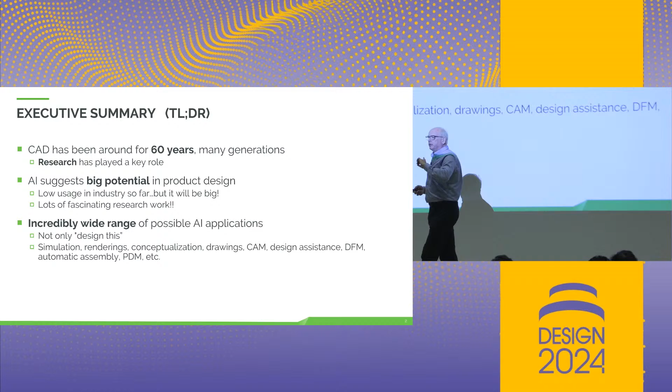It's research across a wide range of application areas. I've seen many people here talking about their work, and I'm going to show you some of my own. But it's much broader than just the nominal AI imaginative task of saying 'go design this for me.' CAM, PDM, rendering, and simulation are all fertile areas for AI thinking.

And finally, I want to talk about what I think we should be thinking about as we enter this AI era—what considerations do we, the tool builders and researchers of our industry, need to be thinking about?

First, a disclaimer about me: everything I'm going to tell you is as far as I know. I'm not an AI researcher and I'm not an AI developer—well, I did a little bit back in the old generation of AI in the 80s, but not today. But I do build real tools, as you know. So excuse me in advance for any omissions or errors I make; I'm just trying to communicate some points, and I know I'm leaving out a lot of information I could have added.

Let's start by going back in time to the past a little bit, because I think it's fun to think about how we got where we are with computers in general. In 1963, Ivan Sutherland wrote a PhD thesis called Sketchpad. How many of you have seen or heard of this amazing work?

Okay, some, but not many.

Incredible vision. This is 1963, and he builds what may be the world's first CAD system, and it's a research project. And he builds this in an era where there is no interactive computer use, there is no graphics toolkit, there is no hardware for interacting with the computer. He has to invent all of that just to fulfill his vision for how computers could help product developers. And wow, did he have vision.

So fascinating video. And you'll see he imagined not just CAD, but a workstation, a light pen, even constraint-based sketching, a hallmark of modern CAD. This is 1963. Incredible vision, incredible research, structural analysis, all part of Sutherland's work.

Now we move to the 1970s, research again leading the way and thinking about solid modeling. As great as Sutherland's work was, it didn't talk about solid modeling, it talked about wireframe modeling. This work is one of many around the world. University of Cambridge, BREP solid modeling. The first CAD systems appear, Computervision, Applicon, big computers, okay? I don't know if anyone's ever used these, museum pieces now. Good at wireframe modeling, not good at solid modeling. Many people tried to make solid modeling work out of the lab. None of the products worked very well.

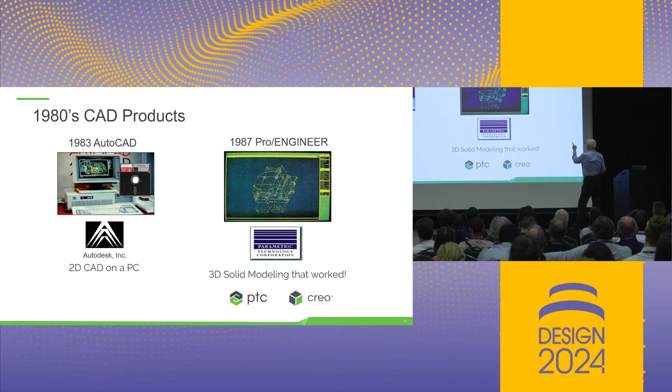By the way, I used to say exactly the same thing before I worked at PTC, where I work now, but when I was at SolidWorks, I would give a lot of credit to Pro Engineer because this paradigm of sketch, extrude, fillet, shell, this is the way all the CAD systems work. If you use SolidWorks, if you use Onshape, CATIA, NX, they all work this way. PTC, Pro Engineer. Today the product's called Creo. It's still an amazing product.

And this SolidWorks, how many of you have used SolidWorks? Okay, quite a few. Great, happy to hear that. We're glad we built it. It helped a lot of things.

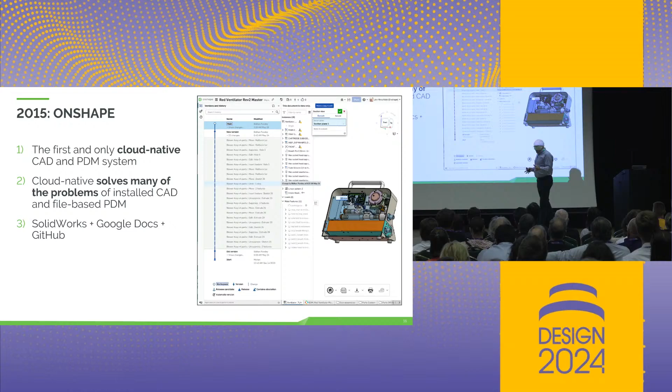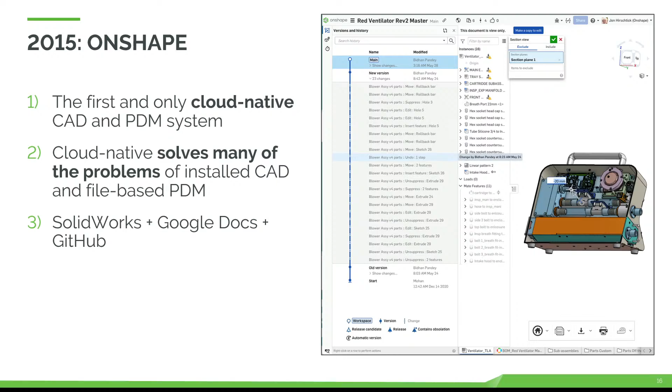However, I stayed at SolidWorks almost 20 years. And I saw our customers having all these problems with installing software and configuring computers and license codes and service packs. And that was the easy stuff. The harder problem was the data and hundreds or thousands of files and copying all over the place. And PDM systems, someone came up to me earlier who had built PDM systems decades ago. And I saw what was happening with cloud and cloud native systems, and I said, hey, we can solve so many problems that the SolidWorks customers have, but we need to build a new system.

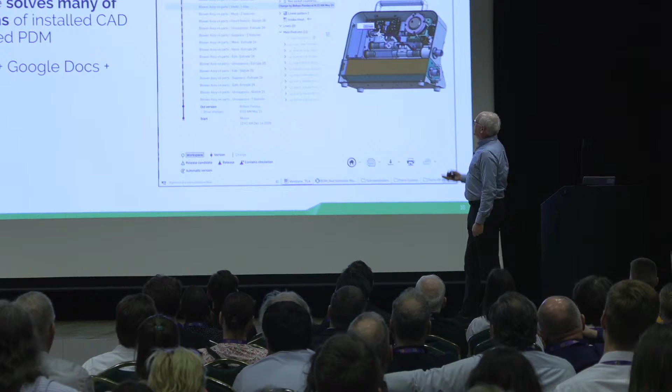And build it we did, and that's Onshape. It's still the first and only real cloud native CAD and PDM system. You can think of it like SolidWorks meets Google Docs meets GitHub, for those of you who've used it. How many of you have used Onshape? Okay, awesome, thank you. I hope all these things are valuable to you, but we have a lot of benefits

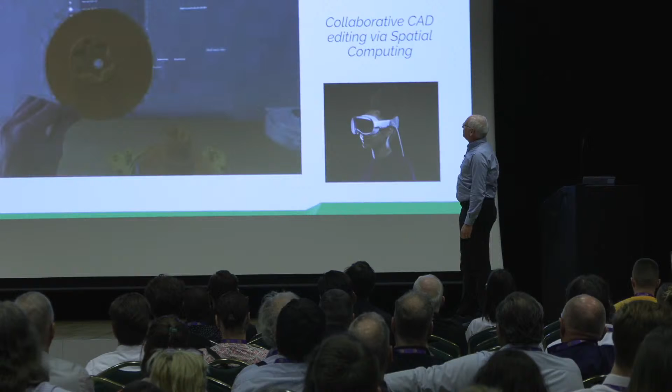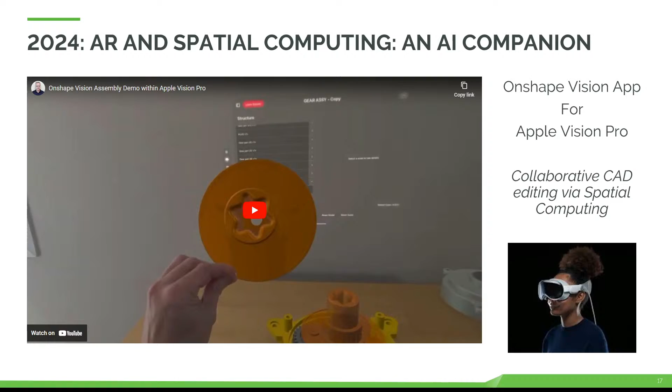here in it. So the last thing I'm going to show you in sort of the pre-AI generation is right at the seam between regular CAD and AI: spatial computing, augmented reality. I have a video here, and I don't know if we can roll the video. If not, that's okay. The video would show you through the lens of an Apple Vision Pro a user manipulating parts in an assembly, okay?

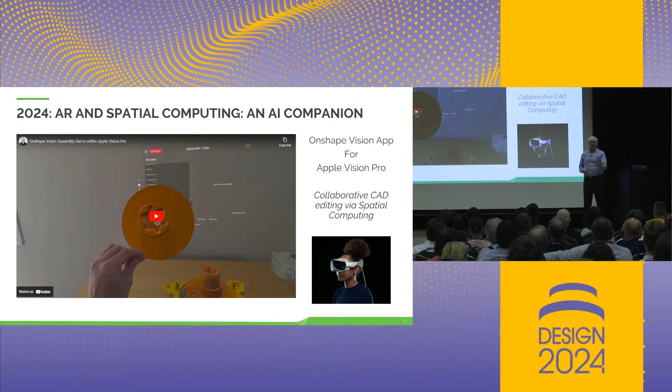And that experience, I think, is going to go hand in hand with the AI generation for certain applications, not all. And in fact, by the way, we have an Onshape application shipping on Apple Vision Pro. It was shipping the day the Vision Pro came out. So for those of you, and I saw many of you are experimenting with AR, you should check out the Onshape Vision app. It's a commercially shipping app, and it's a full client for live CAD data.

You can collaboratively edit data while someone's looking at it through the Vision Pro. It's not just a viewer, it's live editing, okay, and collaborative editing. Really very cool, we're very excited about it. Okay, now I finally get to the AI part, which is probably what you're most interested in.

I take my vision for AI and design from a lot of places, but one of them is Iron Man, the movie. How many of you saw the Iron Man movie? Okay, why am I bringing up Iron Man? When I saw that movie, that was another jaw-dropping moment because it's got Tony Stark, the character, and he's talking with an AI assistant, conversational AI. He's using augmented reality and hand gestures to design.

I found that to be a powerful vision, and I think we're getting closer to it coming true. I'm not saying it has to be like Iron Man, but it's a pretty interesting moment in the movie, and again, I'd encourage you to watch the video.

So what is in use today? AI, if I go into a customer, what can I find? Customer, an end user, not research lab, but end user. What's being used today? And I'll show you a wide range of examples. None of them are being used all that frequently. Maybe 1% of all customers use any of this right now, but it's interesting to see it actually used in industry.

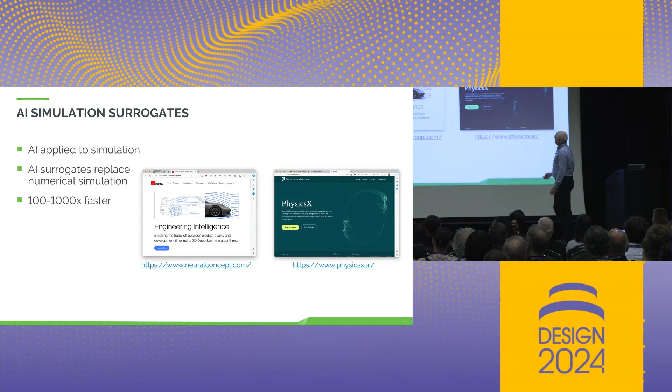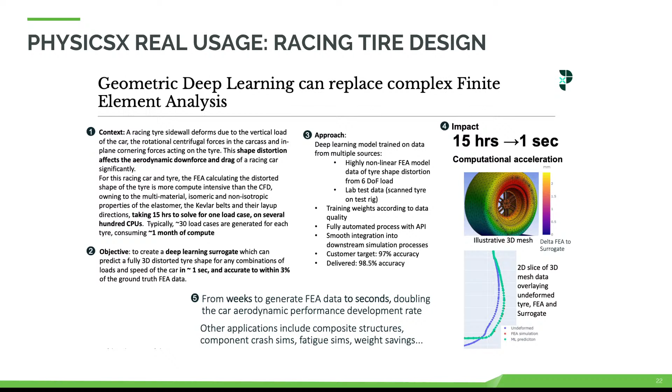Here's an example of a simulation surrogate. Highly nonlinear multiphysics simulation of a high-performance car racing tire. It used to take 15 hours, now it takes 1 second. Very powerful and being used by real customers on many examples.

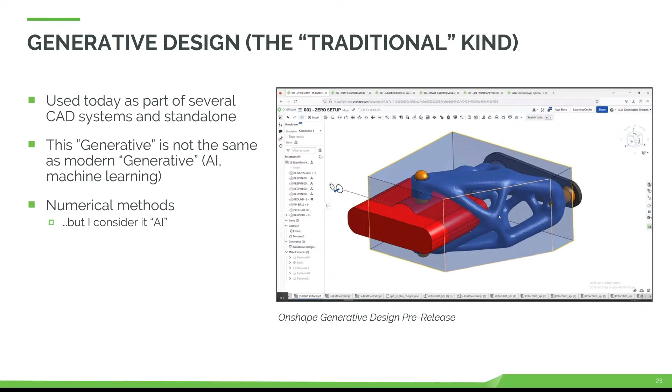Generative design, I'm going to start with the traditional kind, not generative AI, but in this case you give a boundary of the part you want and tell it some loading conditions, and the system will generate a shape. I assume many of you are familiar with this, some of you may even use it. You get these organic looking shapes like the blue part shown here. This is being used as part of several CAD systems, standalone products as well.

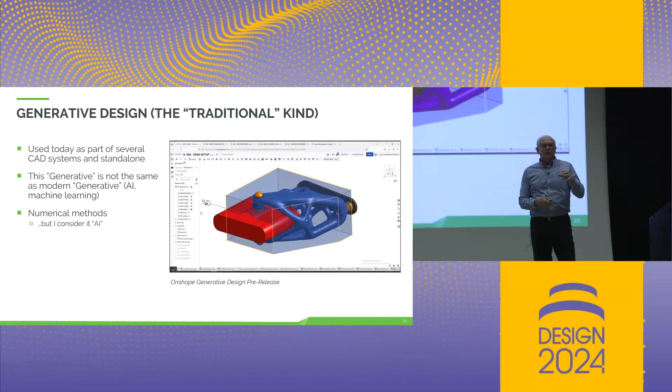The question is, do you consider this AI? Well, I do. And some people say to me, I don't. So to settle the dispute, I asked an expert, I asked ChatGPT if we could consider this kind of generative real AI, and the answer I got was yes, you can consider it real AI. So I feel good now that ChatGPT sort of backs my view.

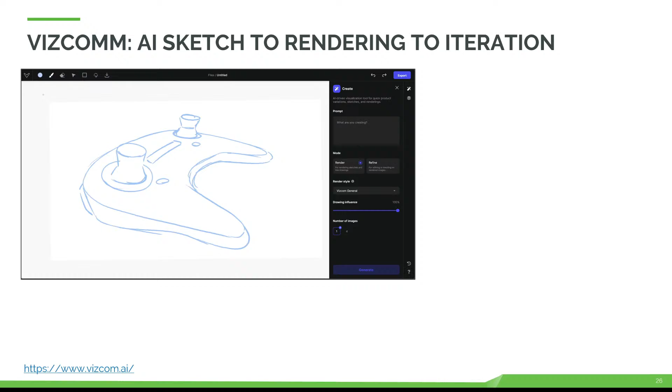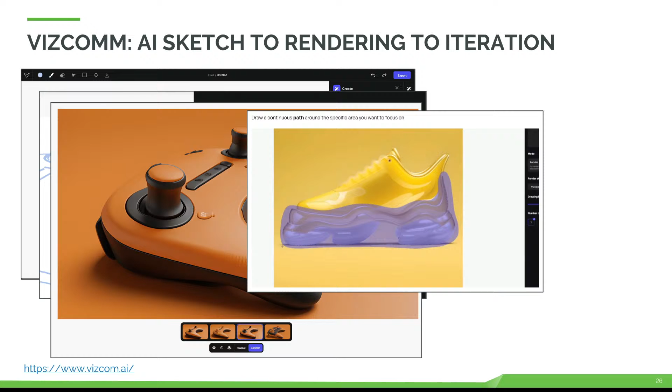Here's another example. This company, Vizcomm, takes sketches and turns them into design concepts in the image space only. So you take a sketch and you say, orange and black controller, Nintendo-like, and it gives you this. Again, just a bitmap image. You can also take an image, in this case, of a shoe and outline the blue area and say, I'd like you to refine just this area of the design, make it look more like an Adidas shoe, and it'll give you the result.

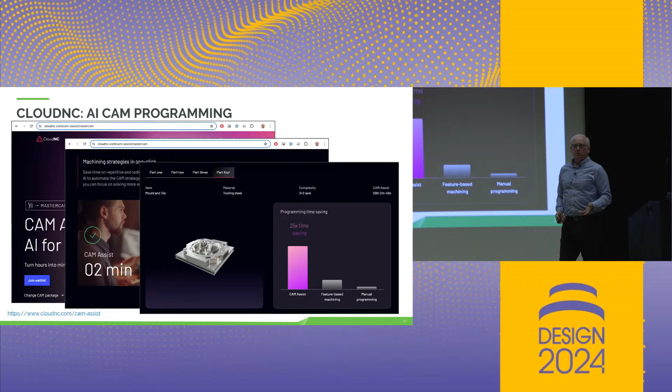Pretty cool, and again, being used in real industry. CloudNC, this isn't a CAM system, but rather an AI assistant for a CAM system, say Mastercam, and it drives the CAM system, creating programs, claiming to go from what takes a human hours to minutes, and they show real parts of interest, and I've talked to people who've used it who say this really does work. So, really cool.

DraftAid, they take a 3D model and automatically generate drawings like this one. Reasonably complicated, suggests real use, and I have heard of people starting to use these. I think the most widely used tool today in product development, though, is just general AI tools, using ChatGPT to summarize things, or ask for advice, or look through spec sheets and things.

I'm seeing people talk about using AI imaging tools to do things like resolution enhancement without even making a big deal out of it. They'll just matter-of-factly say, oh yeah, I used a resolution enhancer to improve the image. So that's a cool thing. This is far and away the #1 use of AI in product development. Okay, so very little, maybe 1 out of 100 companies using anything besides ChatGPT today, but I think it's going to grow. But a fascinating range of commercially shipping applications and an even broader range of research.

Now, I'm only going to scratch the surface in reviewing some research projects that I happen to know of that I think are interesting, very broad range. All the references are in my slides, and the recording of this talk you can find, or you can even grab the number from the slides and go to arXiv.

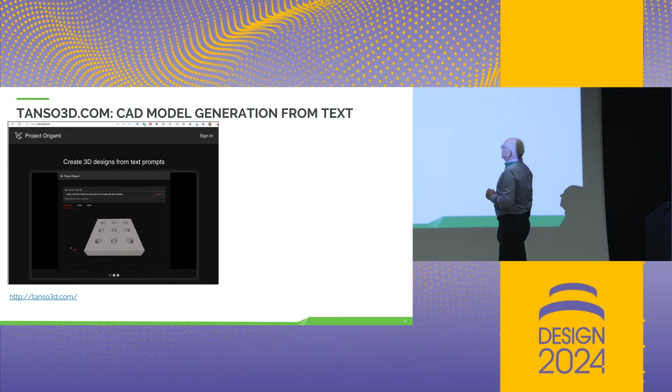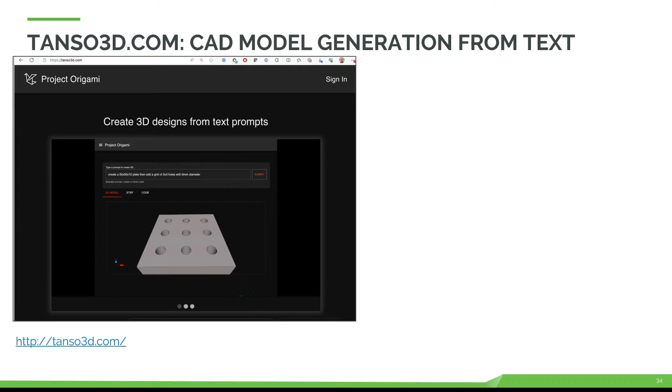Another interesting project, this is a startup company, but I call it research because it's not shipping yet, to my knowledge. This is one of the many efforts I've seen to generate geometry from text prompts. So you say, hey, give me a block that's this big with a 3x3 array of holes, and it will generate it. This is very interesting work. However, it's still very simple geometry, and all the projects I've seen like it are still relatively simple. That's not a knock on it. I'm just saying here's where we are and here's where we're not.

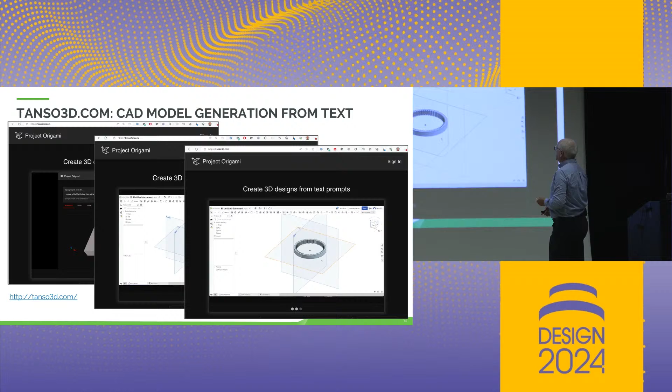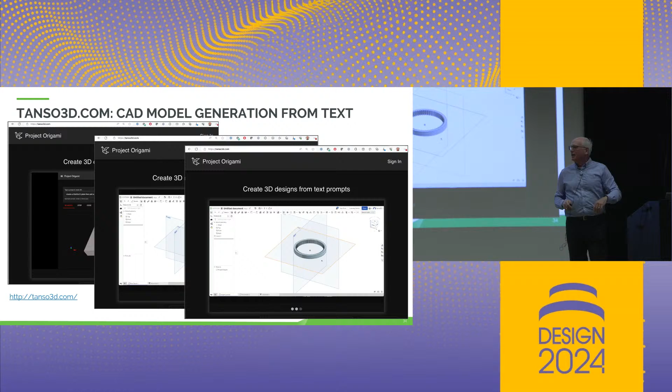This has to become usable for more complex geometries, but it's quite fascinating to see it generate shapes and load them into a CAD system. In this case, Onshape, because it happens to be on their website and it happens to be someone I know, but I think it would work with other CAD systems as well. So that's probably an application you knew about. Here's one you may not know about.

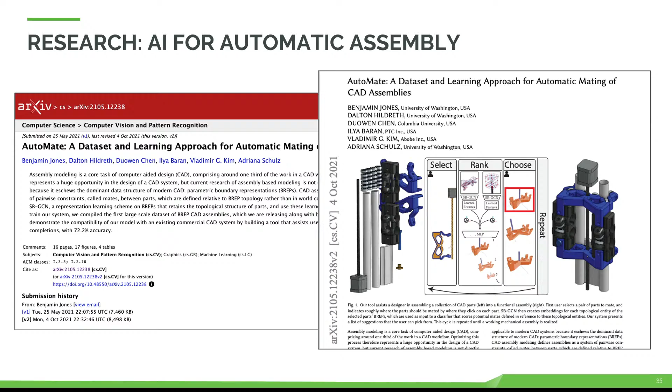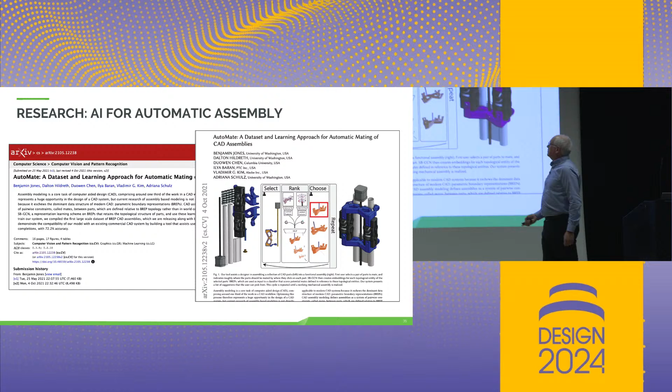This is automatic assembly. Everyone knows you take parts in a CAD system and assemble them with mating conditions, right? You've probably done that. This attempts to do it automatically by training on an AI data set. So you go from this bucket of parts to this finished assembly, and the results are actually very encouraging. This team is from University of Washington and Columbia, but also has people from Adobe and someone from PTC on our Onshape team. Our Onshape team isn't shipping a lot of AI products yet, but is working on research papers, so you'll see PTC employees like Ilya participating in these papers.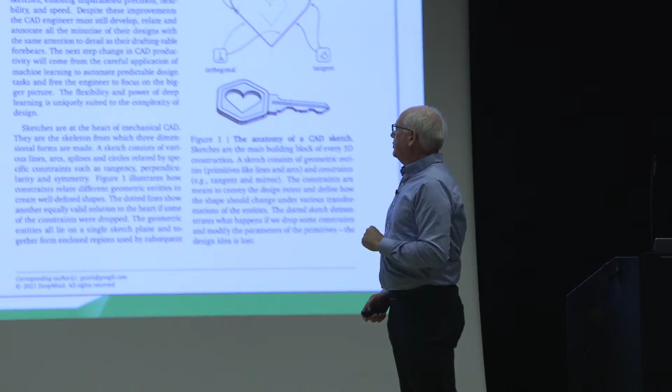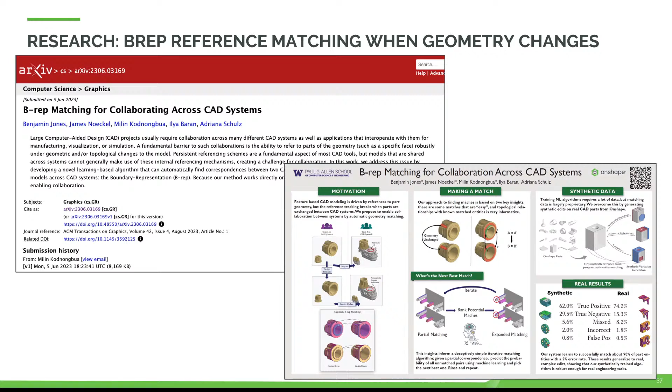An area you may be surprised to know about is work in the nuts and bolts, the nitty-gritty of CAD geometry. This is a project, by the way, something we spend a lot of time on, so we're very motivated, and not surprisingly, a couple of Onshapers worked on this. This problem is you take a dumb solid out of one CAD system and import it into another. Maybe some of you have done this. If not, you'll kind of get the idea.

And you reference surfaces on it to build new geometry. Now the original solid changes, you re-import it. How do you figure out where the references go? Onshape does this already. SolidWorks does this already. Most CAD systems do it already. The question is, could we do it better and faster with AI? And the answer is, not quite yet, but very promising.

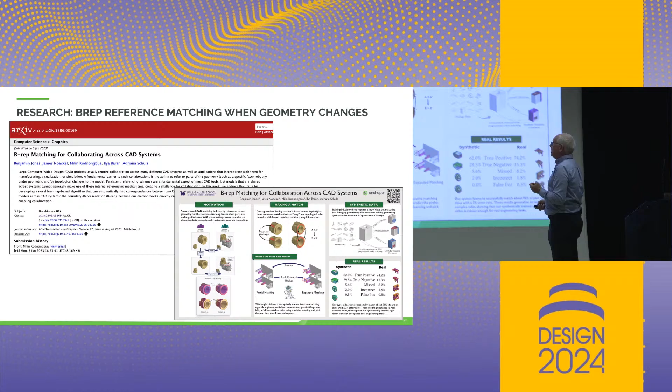And so a rich area for AI for us is the details of geometry. Could we get AI-assisted filleting? Could we get AI-assisted surface creation? This has big payoff because users spend a lot of time doing that.

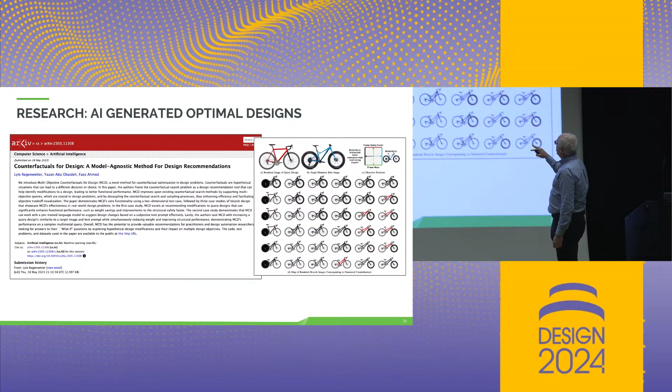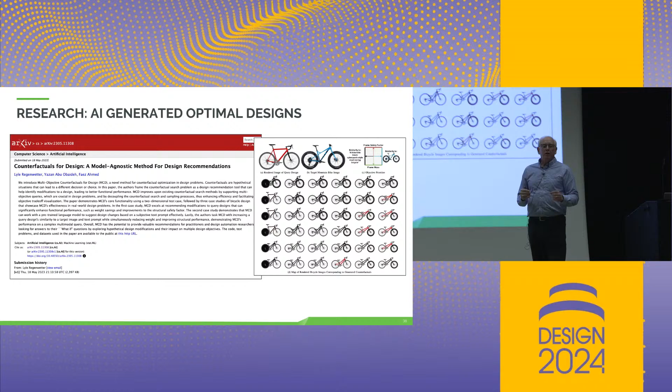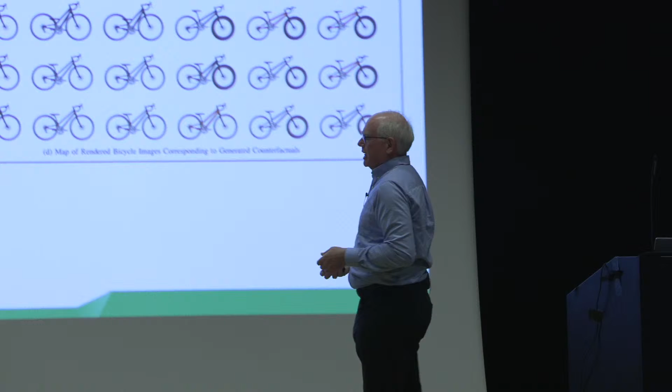This is a fascinating project out of the Decode lab at MIT, Lyle Regenwetter and colleagues. This is multi-objective counterfactual optimization. So it's optimization, in this case of a bicycle, which can include traditional optimization, like make this frame lightweight and strong, but also can bring in simultaneously optimization goals like make the bicycle look like this image that I'm giving you, and also a text prompt, like make it look a little like a black cyberpunk style bike, whatever a cyberpunk style bike is. I don't happen to know that, but the AI bot does, and it will generate an optimized model.

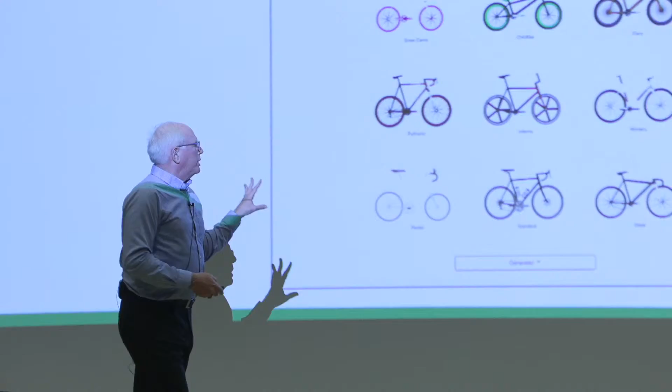I find this fascinating and probably fairly close to being useful for real users. There's a website, again, the link is in the presentation slides, where you can go and try this out yourself. Another very cool product out of that MIT lab is linkage synthesis.

First, they generated 100 million planar linkages. Anyone ever design a linkage by hand? Yeah, not particularly easy. I see some smiles out there, right? There's no easy, obvious way to do it. It's just kind of trial and error. Well, they're working on this with AI, trained it with 100 million, and now there's a result where you can give it a path, like say the letters IBM, and it will synthesize one linkage that will draw that path.

Anyone want to try doing that by hand? Not me. It's a tough problem. And that's a single motor driving the linkage. So I think this is very encouraging. Not everyone is designing linkages every day, but this could represent a class of very labor-intensive design problems that might yield to AI approaches. Oh, sorry to stand in front of you.

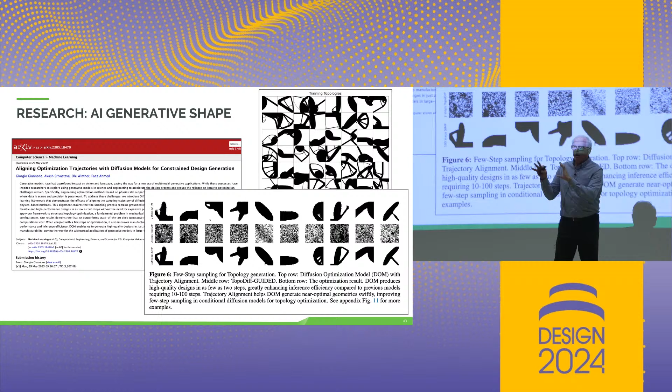This is a really interesting one. I talked earlier about numerically based generative design, right? The blue part I showed you earlier. I think you're probably all familiar with it. This is an attempt to use diffusion optimization to accomplish the same goal in a very different way. So I think the bottom is sort of a traditional approach, and the top row is the diffusion generated approach.

So essentially, as I understand it, and I already told you I'm no expert, you're taking the technology of image generation that we're all familiar with from AI and trying to repurpose it for generative design of structural shapes, in this case 2D cross sections, and it works shockingly well. So this could lead us to better ways of doing even the type of generative design that you know about.

And I'll show you an experiment, consider this from like Onshape Labs. This is not shipping. I can get into why if anyone wants to know. We can do that in Q&A. I don't want to get too distracted. But this is probably nothing you'll be surprised at.

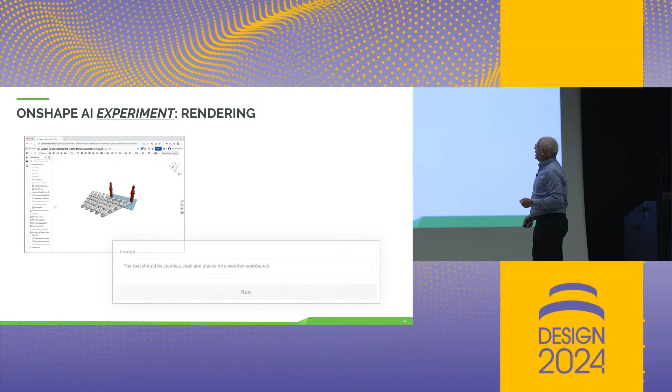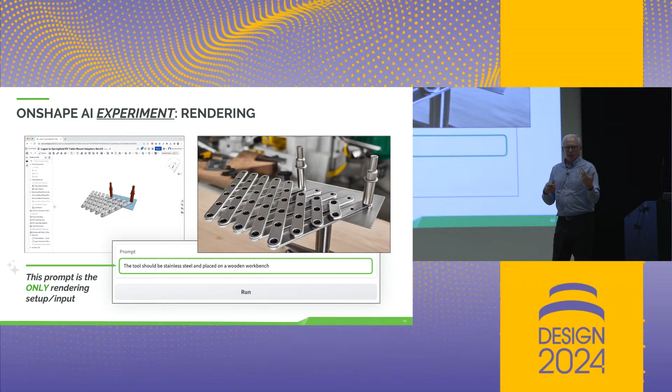You take a CAD model and you just give it a prompt: it should be stainless steel on a wooden workbench, and you run it and you get a nice image. This is the kind of thing we're experimenting with. We, of course, have traditional rendering in Onshape where you can do photorealistic rendering, setting up the problem and all that. We can talk about the differences there.

And finally, in geometry, this is my last geometry generation project. This is a system out of OpenAI research that generates 3D objects as point clouds.

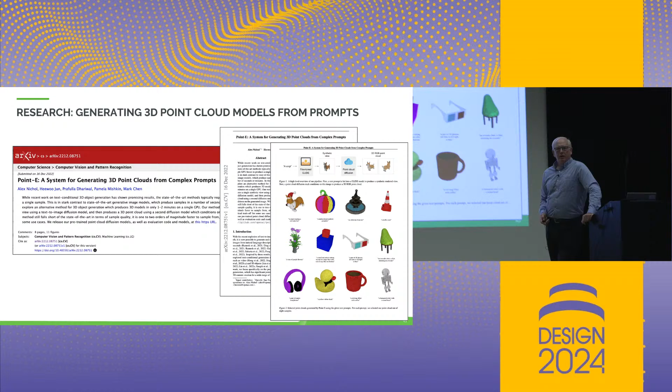Okay, so these objects here are generated from text prompts, and they're point cloud geometry. Very coarse objects, but a surprisingly rich range of descriptions, like a vase of purple flowers, or a red coffee mug, and it generates it. So this is interesting work, and interesting to see OpenAI venturing into our world of CAD and design tools in 3D.

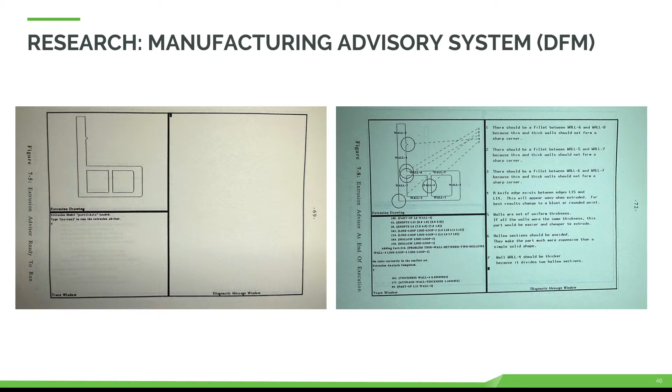Here's a system for manufacturing advice. You start with an aluminum extrusion cross-section over here, and then the system tells you manufacturing improvement items, design for manufacture. You should eliminate the sharp edge. You should make that wall thicker, and so forth.

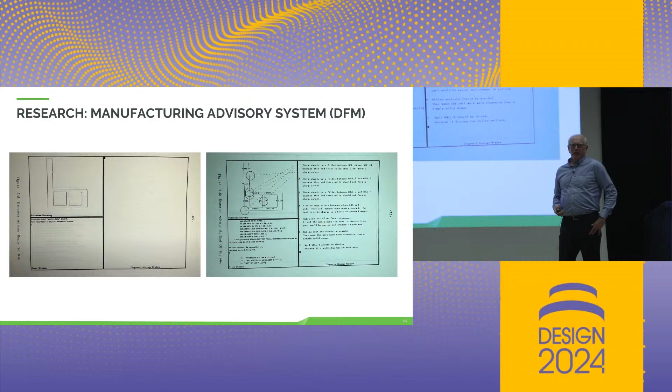This I threw in for fun. This is not a modern AI tool. This is from my own master's thesis in 1986. And if you remember, I mentioned that we did some AI work in the 80s because we thought AI was going to be the next big thing, and I actually wrote my thesis on a Lisp machine, if anyone knows what that is. If not, you can Google search that.

And I said in the thesis, artificial intelligence programming languages and environments are very valuable tools for developers of CAD software. I was only about 4 decades off in time, and that's the way it is with research sometimes, right? But seriously, the tools I had in that day were completely primitive compared to what's going on today, but I just thought it was fun to show you that.

And there's many more potential areas. PDM, industrial design, I mentioned. Anywhere parameters need to be entered, design standards, requirements and specs. It doesn't have to be geometry. It doesn't have to be 3D like I'm talking about. But hey, that's where I spend my day job, in 3D, so that's what I think about. But there's a lot of design help that can be done that doesn't involve the hard problems of geometry, and those can be as much or more valuable to the product developers of the world. Geometric search is another big area that I didn't cover.

So that's my quick tour of a bunch of different research, and I only scratched the surface, but I hope you're inspired a bit by the breadth of what people are thinking about. I asked a professor friend, who knows everything about AI and product development these days? And they said to me, nobody. There's too much going on, and it all changes every day. Maybe someone in this audience knows everything, but I haven't met anyone yet who knows everything.

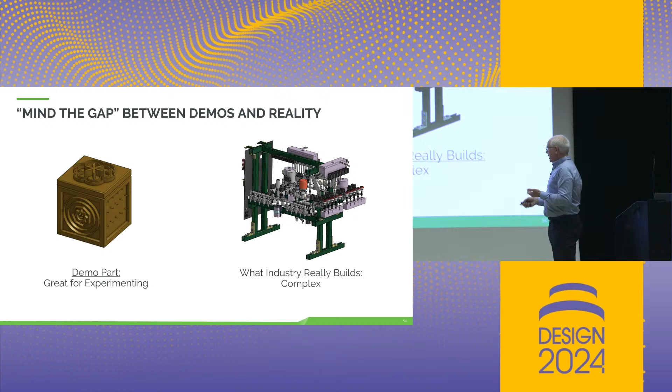Don't get too far along on that PhD project before you test some of it, because this is all new frontiers - hyper agility is called for. This is really important to me. I say mind the gap between demos and reality. It's great when you do a project and show an example like this, and that's totally appropriate and valuable, but don't confuse that with what's done in the real world. The real world is more complicated, and eventually the tech has to get there to be valuable. We can't sell a CAD product that makes objects like this - we need to make objects like this.

Speaking of that, this is an Onshape customer, Ocado, and this is their 600 series grocery robot. Another YouTube video you can watch - it's an amazing video. Just punch in Ocado 600.

The topic I want to talk about is multiple 3D modeling methods - implicit, lattice, voxel, point cloud. These are all growing in usage, and you saw it in the research. It's not just because of AI, it's because of generative design and 3D printing. We need to better mix old and new geometry models into cohesive systems and processes. We need smooth workflows for users. We can't tell users, well, export your point cloud and run it through a converter that makes a mesh, then run that through another converter that makes this crummy NURBS model that barely holds together, then import it into CAD. Oh wait, you want to iterate? Well, you've got to go back and do all that again. That's not going to cut it.

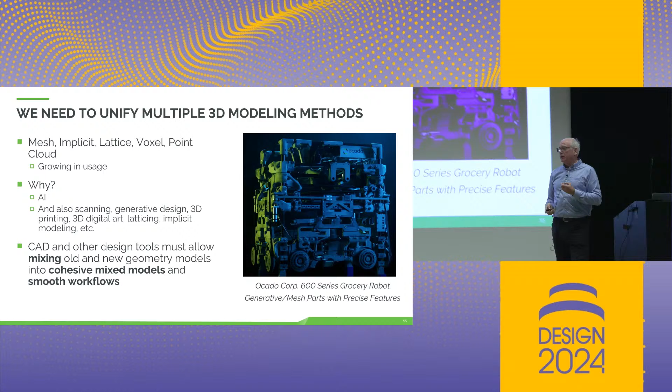We need to think about geometry. I think the future is mixed - I don't think one representation will win out. I think we have to think about all of them working together. And this product illustrates that, because it's the only shipping product I know that does this. It's a grocery warehouse robot, by the way, about the size of R2-D2. It has hundreds of generative designed, meshed or implicit modeled parts, combined with precise B-rep surfaces - for those who know what I mean, precise surfacing, because it's a machine and it needs precise surfaces.

All right, great AI starts with great data. Remember I mentioned the 5 million sketches? Where are you going to get those? The Onshape public model library. I don't know if you realize this.

We have online in the cloud over 10 million public open source licensed CAD documents. Some of these documents have huge models in them. Actually, I think it's closer to 20 million now. This is a really, really good data source for you.

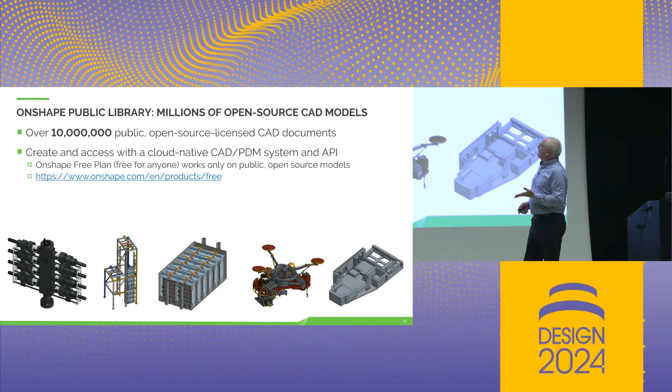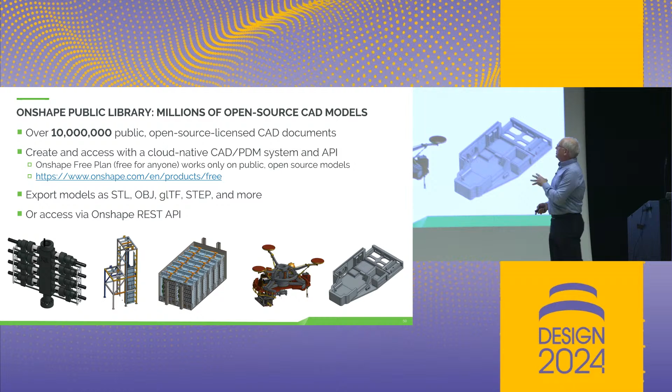These are created by our free plan users. We have a free plan not for education, but for makers and open source people that have made these. You can export them, access and manipulate them via a REST API.

We already have some major AI data sets published based on Onshape data. Any of you know the ABC data set? That's sort of popular out there. That's based on Onshape data.

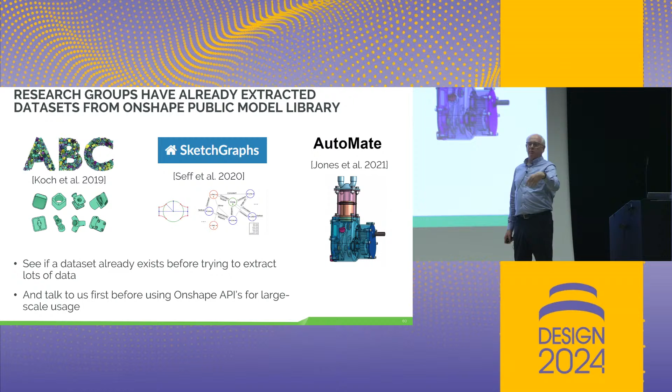If you're interested in making a data set for training, first see if one already exists, and if it doesn't, talk to us, we can help you. If you're going to do something large scale, speak with us first. I'm not sure Bernard and Kieran are ultimately the people, but they can get you in touch with the right people, Matt on our team or someone like that. We have a whole team of people, and they've been through this. They can help you get the best experience out of creating your data set. Don't go calling our API 28 million times before you've had some assistance with how to do that well, okay?

Speaking of our API, it's a great research tool because we have the whole CAD system and PDM system available through a REST API. I think we're about the only ones that do that, because when our end users use Onshape, all the traffic is going through web APIs. We don't have an installed app. So you really get access to everything.

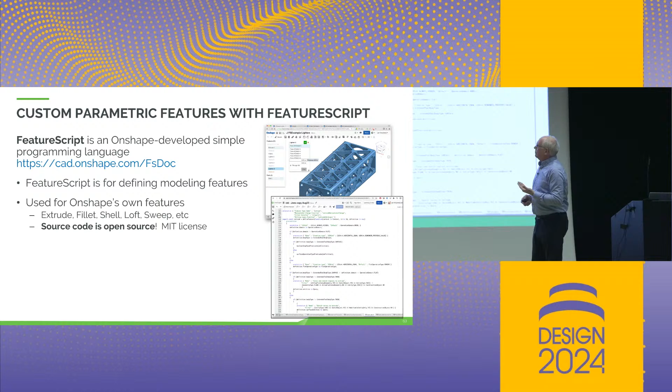Finally, we also have this unique language called FeatureScript. Anyone heard of this? This lets you create features of your own. FeatureScript is used by us to write our own features like extrude, fillet, shell, loft, sweep, those building blocks. In other CAD systems, those are hard-coded, but in our system, they're written in an open language called FeatureScript, and we give you that code, open source, for you to modify. You can create your own features. You can create a CAD system in a CAD system.

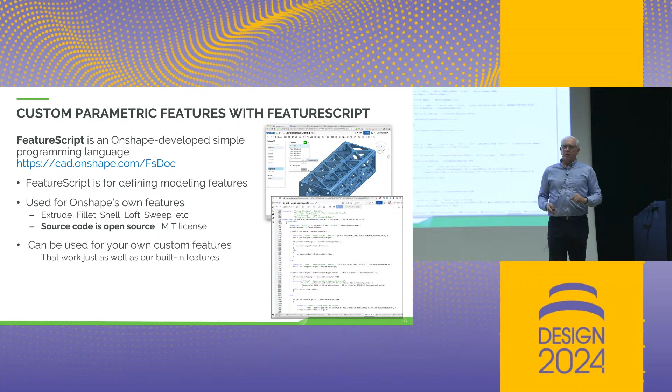This is valuable for certain types of AI projects. You can think about that, and again, you could see that, right? Bernard and Kieran could show you this.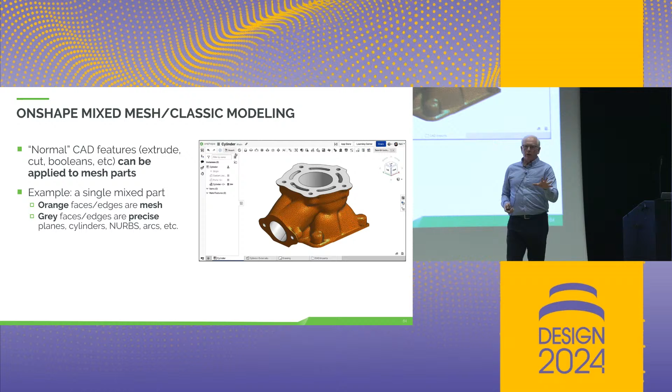And then mixed modeling. I spoke earlier about mixing modeling representations. Here's an example of an object in Onshape where you can have mesh parts, you can have precise parts, and you can also have parts that are a mixture of mesh and precise geometry. And they all work with the same set of modeling tools. There's no mode, there's no conversion. So this part here, the orange faces are mesh, the gray faces are precise. Again, some of you, if you're working with geometry, this is a very cool thing. If you're not, it's not for you, but I mention it because it's really powerful. It takes away a lot of the need for all that messy conversion stuff.

Finally, Onshape is also PDM. We have revisioning and versioning. We have branching and merging like GitHub, if you've used that, okay? And a complete history of every edit that's ever been made, who did it and when. This is great data. I know some researchers are using it at different universities around the world. Someone here was talking about using our data. Tremendous amount of data for you.

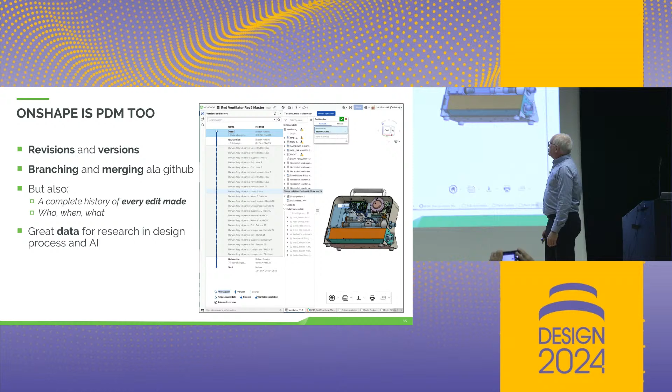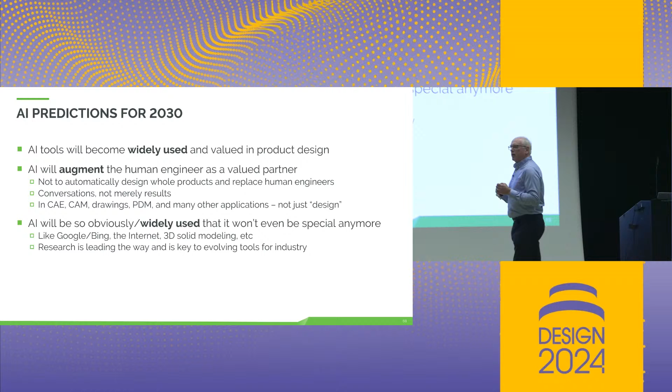And I'll close with my predictions about AI. First, I think AI tools will become widely used and valued in product design, period. I think that it will augment the human engineer, not replace them, which I hope we all believe. And I think the applications are not just, hey computer, go design a product, but rather in things like simulation and CAM and drawings and so forth. I think AI is going to become so obviously and widely used, it's going to be the way computers or the internet or Google search became.

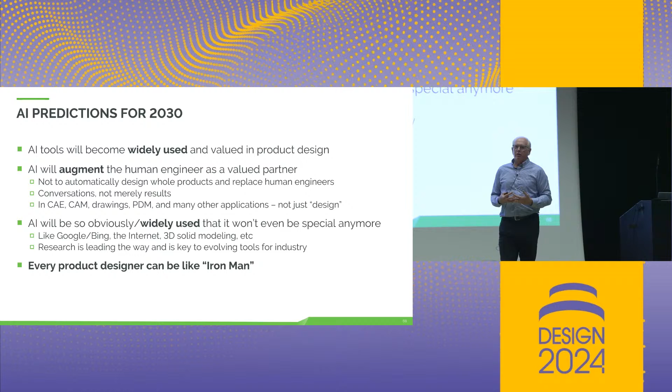At one point in time, they were these incredible things we were noodling over how to use, and now they're just givens, everyone uses it. We don't talk about it as much anymore, right? I think that's what's going to happen with AI. It's because I believe in it so much. I think that AI is going to give every product designer the capability to be like Iron Man. So with that, thank you very much, and we have time for questions, right?